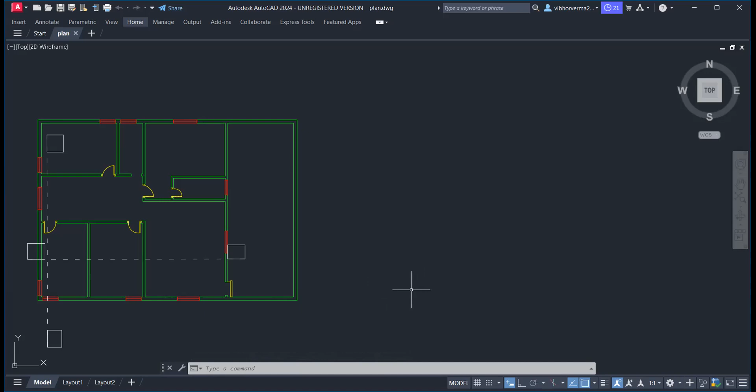Ritika, what about you?

Ritika? Ritika, Purval, what is the update from your end about the assignments?

Okay, you contact me personally, Ritika. Fine.

So now, today we are going to start the electrical and plumbing layout here.

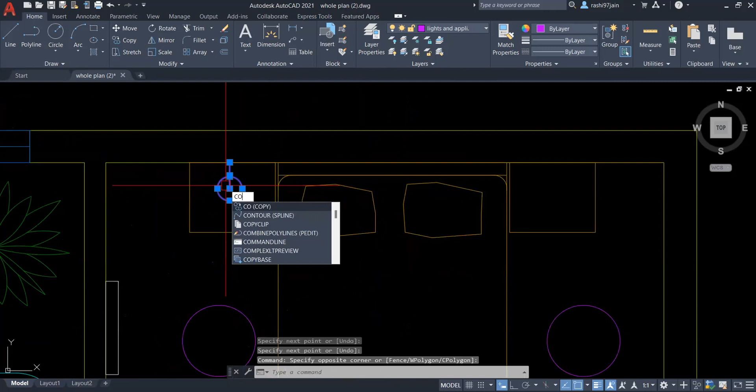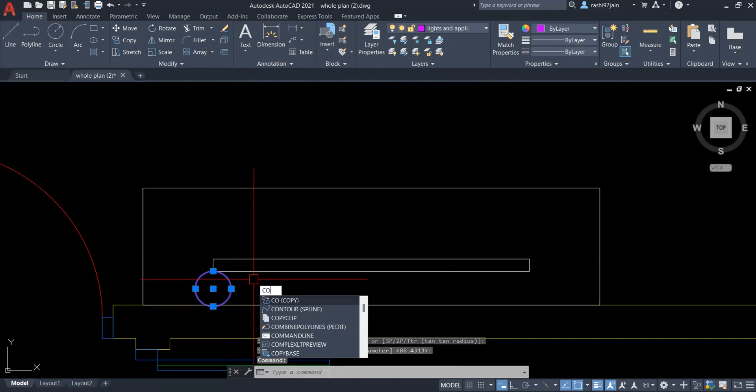Done. Then here you have the TV unit. Suppose for the TV unit, we are providing 4 drop lights, spotlights.

See guys, it depends on which space you are designing. You can't give as much light in a bedroom as you would in a living room, right? This much light is more than enough.

Okay, but no need to worry about it guys, we are not going to place circles. We have proper symbols, I'll teach you that part. But first understand the concept, then I'll show you symbols etc. Now position of the light is done - this much light is more than enough in bedroom.

Then I want to place connections, but till where will you show the connections? You need some limit, some boundary, right? So that limit, that boundary means switchboards here - you have to place the switchboards.

Now simply Shruti, you can place the rectangle, nothing else.

How to show the lights inside the floor? We call it uplighters. Same thing, you can show here only. You have symbols for that, I'll tell you.

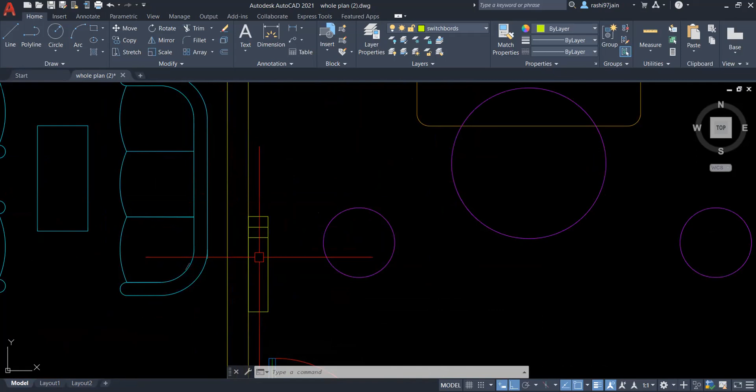Now 2 switches for 4 lights - you can't show a 4-light connection on a single switch, okay? If you need to turn it on, all four lights turn on; if off, all four turn off, right? Don't do this. Remember, 2 lights' connection on one switch and 2 lights' connection on another switch, okay?

Then one switch for a ceiling fan. Then again 2 switches for 2 plugs here.

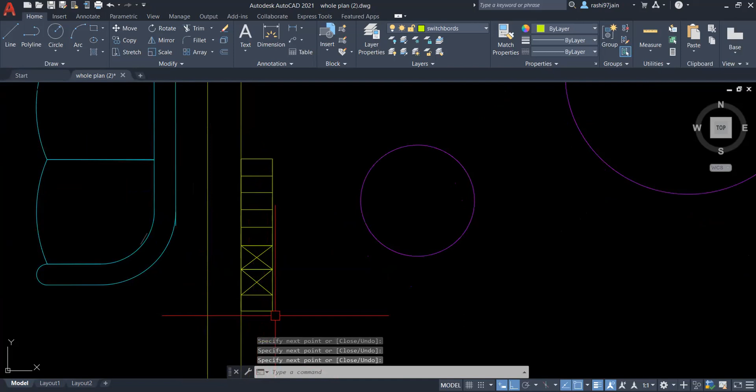Enough. Now here you have this TV unit, so for the TV unit also you need to place the switchboard - TV plugs etc. all need to be shown, right? So same.

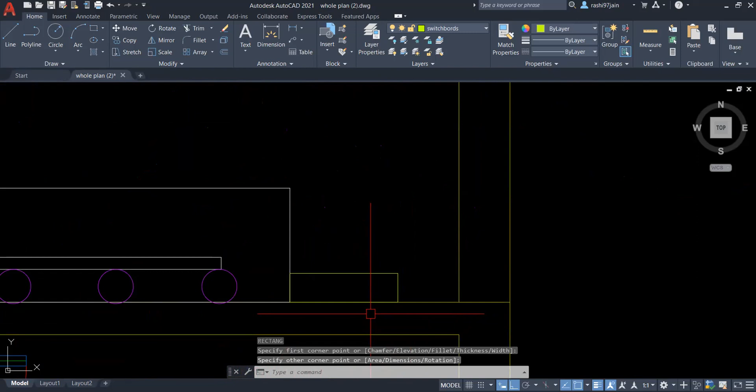2 lights and 2 switches for 2 plugs. Minimum 2 plugs are needed, no? One goes to the TV and second for your set-top box or home theater or whatever it is. Minimum 2 plugs are needed. Done.

And then last, guys, nowadays everyone wants a charging plug near the bed, right? So what you have to do - simply show 2 small switchboards near the bed.

One switch for this light and one switch for one plug here. Done. I will copy the same thing for the other end here.

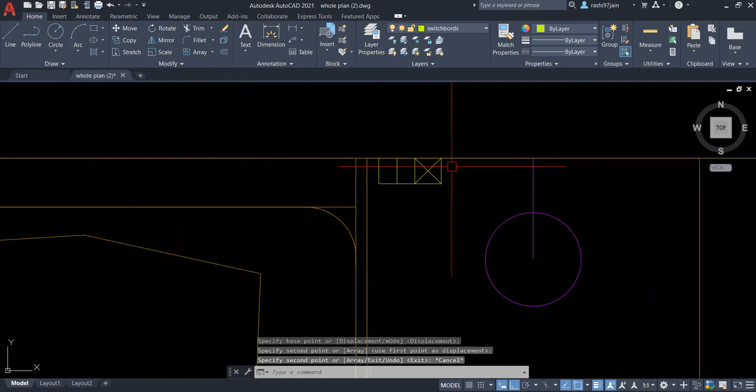Okay. Now, again, this much is more than enough. Switchboards, it's more than enough.

And then at last, you have to show the connections. Remember one thing, see your charging cable, your phone charger, your laptop charger, or any wire, any cable, it won't be straight, right? It will be little curvy, wavy type.

So you can't use a straight line to show the connections. That's why you have to use a spline here. Simply give SPL enter. Make sure your ortho is off, and then using spline, show the connections here.

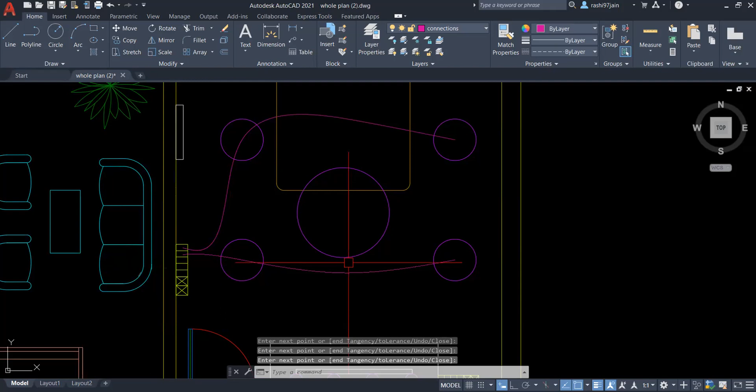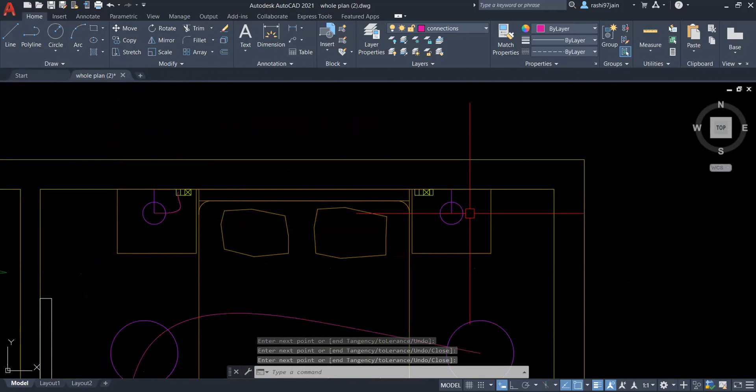Two lights' connection on one switch, 2 lights' connection on another switch, and a ceiling fan, right? Then, see, one light's connection, and again another light's connection, and at last these 4 connections.

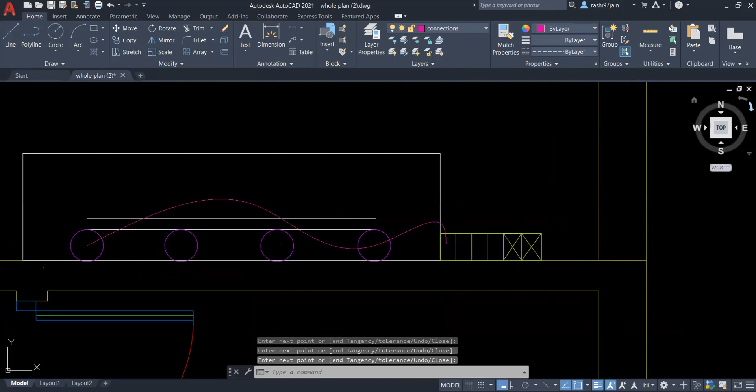See, 2 lights' connection on one switch, 2 lights' connection on another switch. Rest, the plugs and switches you have. See, it's done. First, position of the lights. Second, connections. And third, switchboard, right? But you can't present this drawing to your client.

It'll look like a child made the drawing, right? So remember, you have to use proper symbols there. Okay.

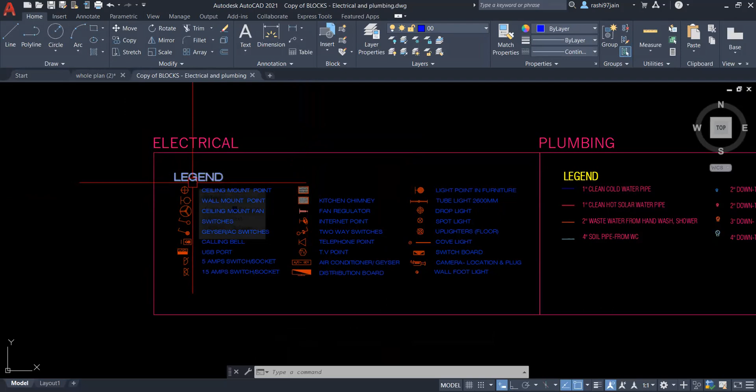This electrical and plumbing block file is uploaded in your Google Drive. You can download it later. First, see this now. So here you have electrical legends. Legend means symbols. These are the standard symbols.

If you want to show ceiling light, use this symbol. If you want to show ceiling fan, use this symbol. If you want to show a drop light or spotlight, use this. Now give Control C to copy, Control V to paste.

Done. Now guys, remember, whenever you are placing the blocks, yesterday also I told you, never ever place the blocks directly in the drawing. What you have to do? First, explode these blocks.

First, explode these blocks, place it in your layer. Whichever layer you are working in, you first place it, then explode it. It's difficult otherwise, that's why first explode it, and then basically you can place it.

See the difference? Ceiling lights in. Then ceiling fan is there. Once you are done, no need of this circle, you can delete. Then the same, the spotlight, drop light.

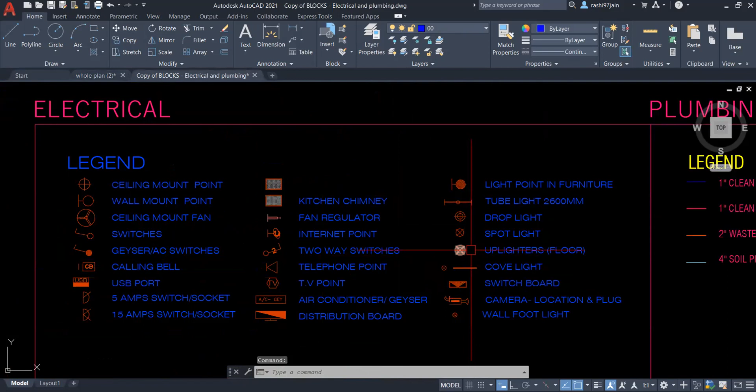Right, see now? Proper symbol, position of the light is done. So whichever lights you are using, floor lights meaning uplighters used on the floor, same way you can show this on the floor. For cove light you can use this thickness and you can draw. Done.

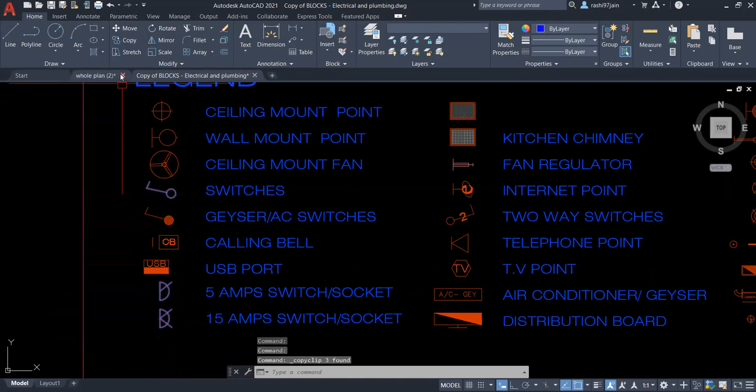Then second will come the switchboard. See here you have 5 amps, 15 amps, meaning 2 pin, 3 pin socket. Take this, and the switches' symbol is this. Same, Control C to copy, Control V to paste it.

Again the same thing. First, explode it, place it in your layer, and then wherever you want, you can basically place it. See, 1, 2, 3, 4, 5. Once your placement is done, you can delete those squares, rectangles, it's not needed.

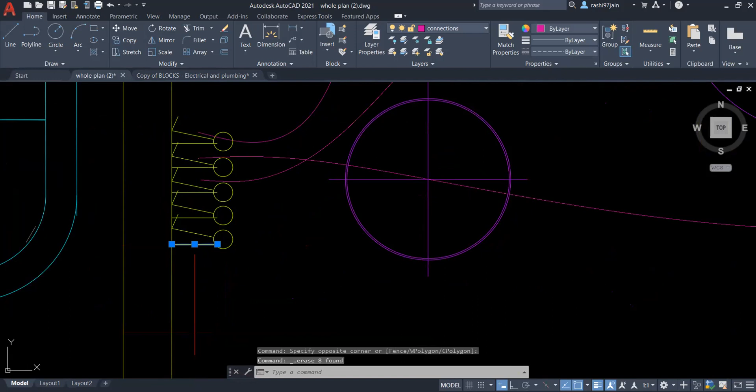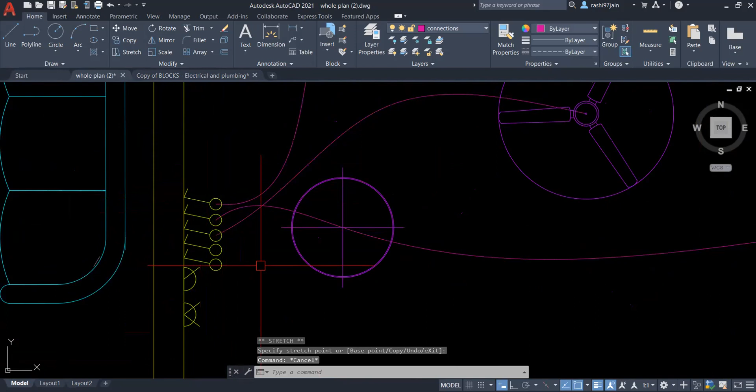And the plugs also you can show here, right? Now these connections, place it in the center here. You see? It's done. Meaning when you'll click, you'll understand that okay, from this switch this will turn on like this.

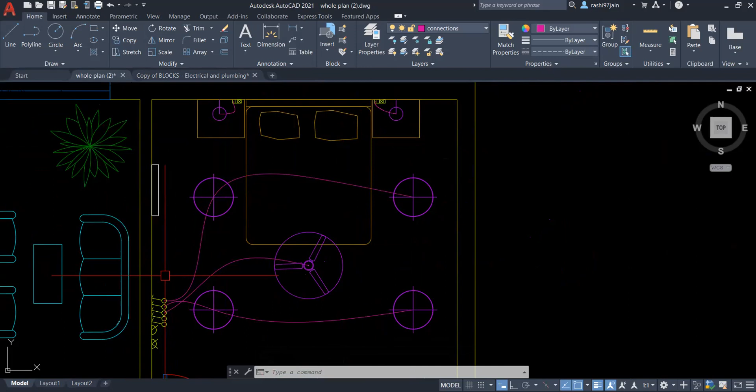But suppose someone is lying on the bed who wants to go till here to turn on and turn off the fan. No one wants to do this, no? That's why what you can do, you can provide a two-way switch, you call it a double switch. Meaning the same object you can operate from two switches. See? From here also, from here also. You know, right?

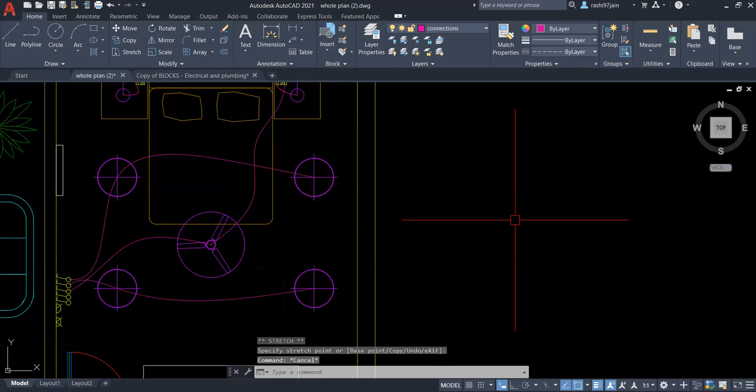Now for switchboards, symbols were used, okay, done. For lights and appliances you are using symbols. But what about connections? So remember, for connections you have to use spline only, no doubt.

But you can't show the splines, the connections, in a continuous line type, never. Remember what you have to do. Show these connections in a dash dash line type. Yesterday also I told you that in AutoCAD if any part is hidden and you need to show it that way, then you have to use dash dash line type there.

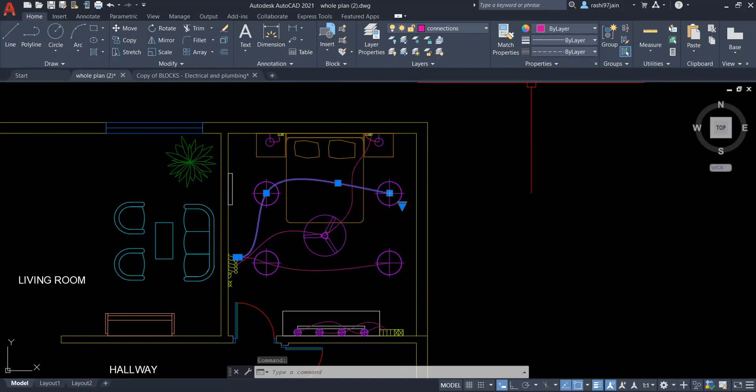Okay. Because if you are sitting, if you're looking at the ceiling, you won't be able to see connections, cables, right? It will be hidden definitely. So what you have to do, only change the line type here. It should be dash dash line type. I've already changed it. If it is not visible, then go to properties and change the line type scale here. It doesn't matter how much you are increasing or decreasing. It should be visible only. That's it.

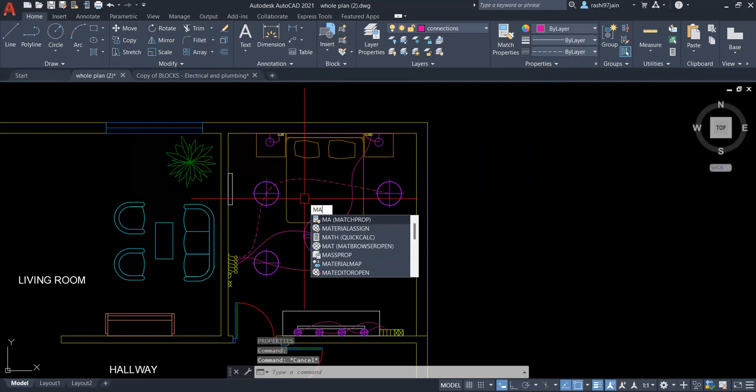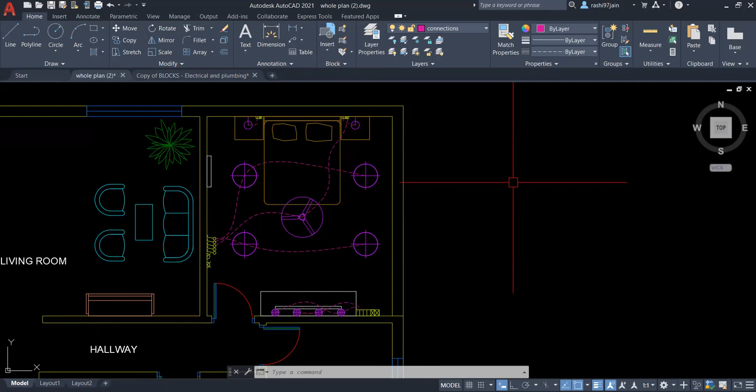Everywhere connections, we match this. Okay, and see now it's done. So this is the final drawing. This is the final output. The position of the lights and appliances, switchboards, and connections. This is for the bedroom only. Same way you can create for the entire plan.

But at last, don't forget to provide the legends here. Legends means these symbols only. Same, you can copy paste whatever you need from here. This symbol shows this thing. That symbol shows that. Like this. So is it clear, guys, how to create the electrical layout here? You understood?

Fine. So do one thing. For the plan you guys are working on, try to create the electrical layout for the living room. Only for the living room. I'll give you some time, I'll wait. If you want, use symbols, or else for now practicing with circles is also fine. Practice the electrical layout first and let me know. Then we'll proceed with plumbing layout. Try it out.

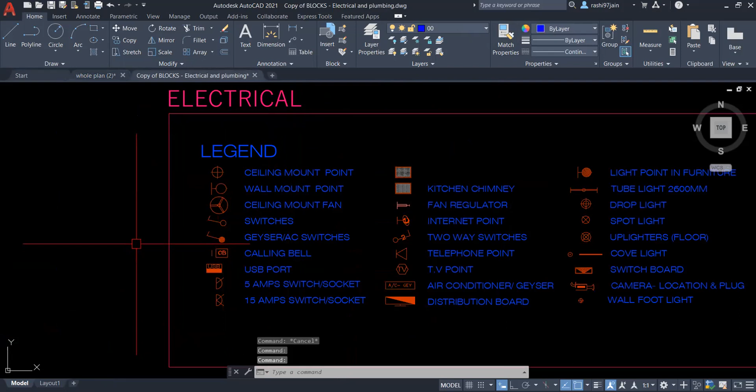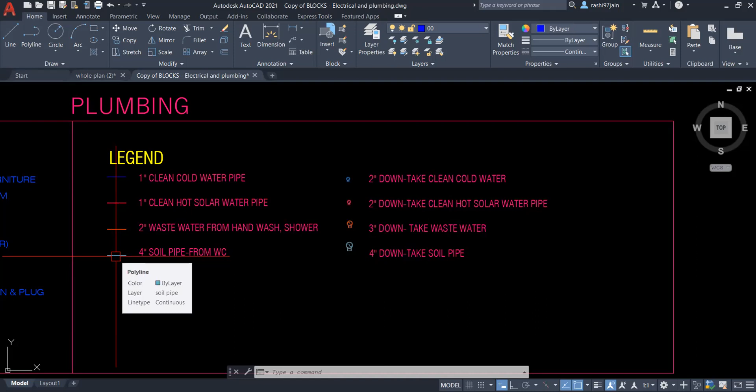Okay. Now see, after this, we'll proceed with the plumbing layout. Now, what is meant by plumbing? So guys, plumbing is basically nothing but the pipelines, the connections you have to show. Here you'll find 4 lines. Blue for clean cold water, red for hot water, orange for wastewater, and blue for soil pipe. Cold water, hot water, wastewater you know already, right? Soil pipe is for collecting whatever solid waste is coming through your WC.

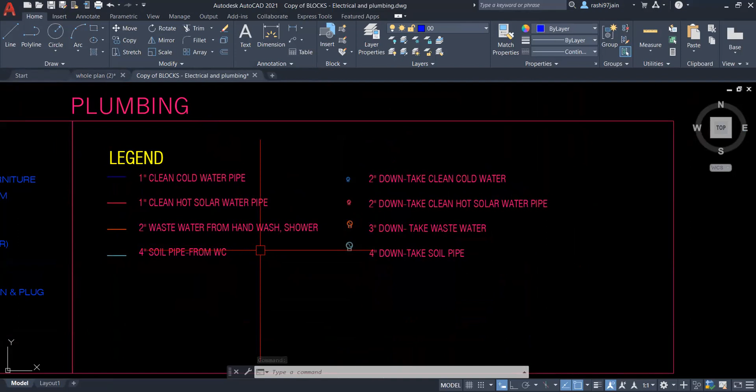Now, remember, the pipelines you can show using this straight line here. The spline, the curved line, is for the electrical layer. The straight lines are for the plumbing, for the pipeline. But till where do you show the pipelines? You need a limit, a boundary, right? That boundary means the main pipes here.

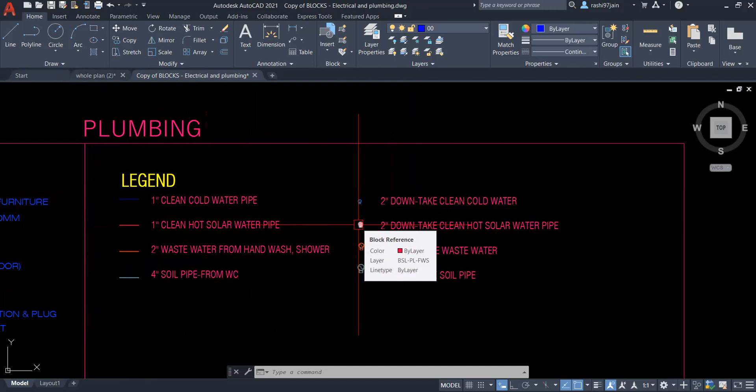Now, it's not that you have to use the same colors we are showing. If you want, you can change the colors also. But remember, you need to use the same color code for the main pipe also. See, blue for clean cold water. Same here, blue for the main pipe. Red for hot water. Here also red for the hot water. Same. I copy paste the main pipes here.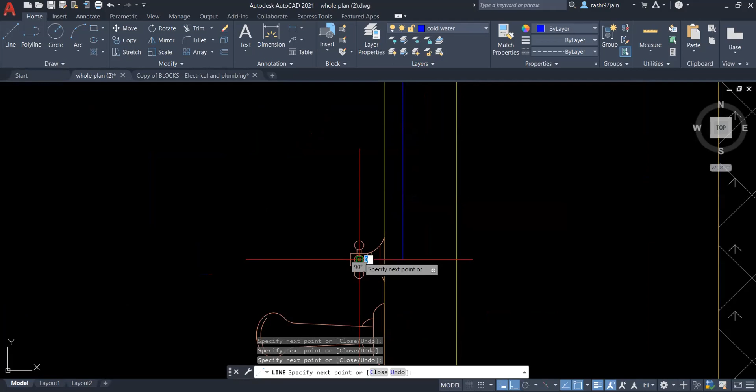Now, one by one, we'll show the connections. So I'll take clean cold water first, using the line tool. Show the clean cold water here in the WC, then in the wash basin, then in the wet area, for the fixtures. Till where? Till the main pipe here.

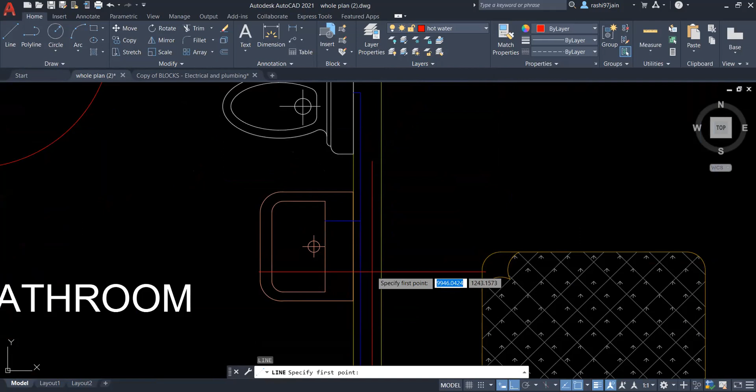Again, I'll take hot water. Hot water pipe is not needed in the WC, right? So, hot water pipe connection in the wash basin. Nowadays clients want a hot water pipe in the wash basin also, so you have to provide that. Then again for the fixtures, till the main pipe here. Done.

Then I select wastewater to show the wastewater pipe. The wastewater will go from your wash basin.

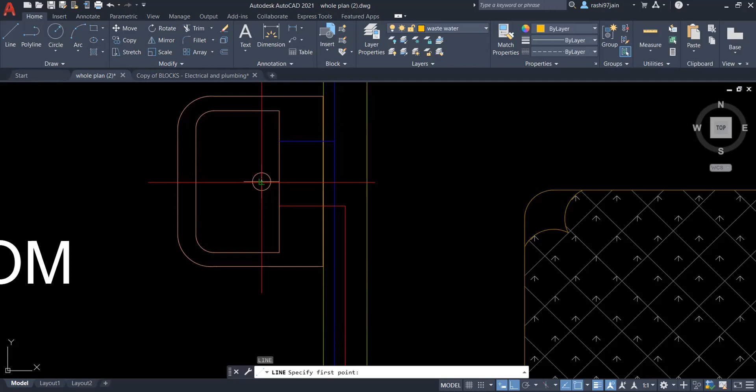And then at last, select soil pipe. As I told you, soil pipe is nothing but whatever solid waste is coming through the WC. Okay, straight to the soil pipe here. Then the main pipe. No need to break this pipe anywhere.

That's it. Now I know you guys are thinking, ma'am, so many connections and pipelines go through the wall. No. Practically it goes through the floor. Okay. The plumbing pipelines go through the floor. But for the presentation purpose, you need to show this through the wall only. Okay. Only 4 pipelines are there.

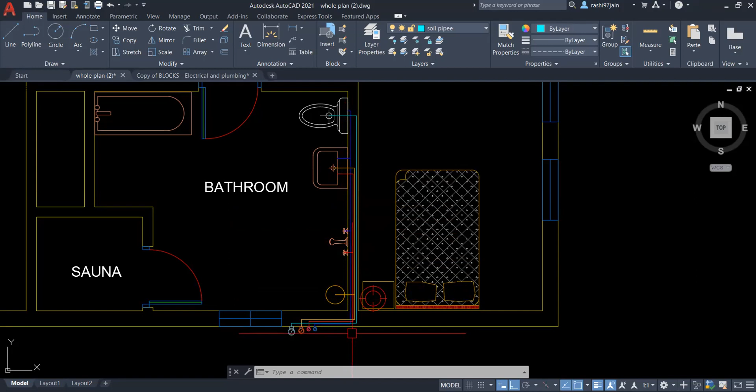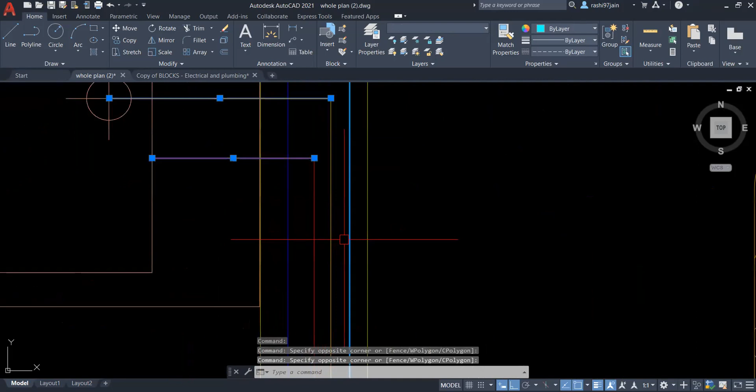Place it. But once you are done, select, and you have to change the line weight here. Okay. You have to change the line weight here. So select the lines. Then from here, change the line weight and change the transparency also by 40%. You can change the transparency here and see, it's done. Okay.

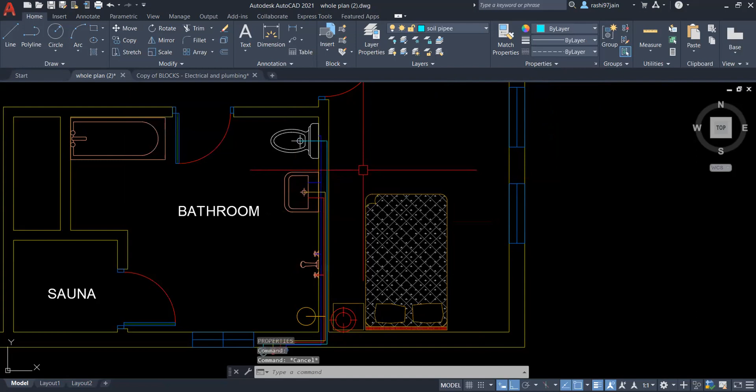Once you are done with this, again, don't forget to place the legends here saying that okay, this color shows this and that color shows that. Okay. So is it clear? You understood how to create the plumbing layout? Fine. So try out the plumbing layout for the kitchen area of your plan, and let me know once you are done.

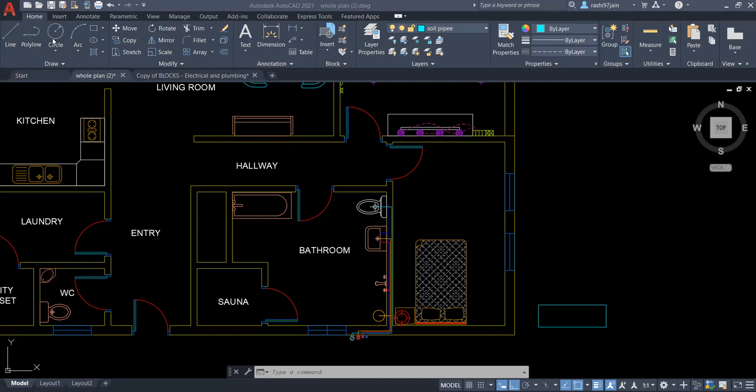Okay, guys. So what is the update? Is it done? Electrical and plumbing both. Fine. So see, I'll give you one assignment here. What you have to do, create the electrical layout for the entire plan. Okay. For whichever plan you guys are working on, create the electrical layout for the entire plan and then create the plumbing layout

for that same plan. Remember one thing, you cannot create electrical and plumbing layout in the same drawing. Okay. Make a copy of that plan. So in one copy, you can create the electrical layout, and in another copy, you can create the plumbing layout. Okay. As you know, today is the 9th class. Tomorrow will be the last class, which is your 10th class.

Okay. So now I'll assume you guys are ready with your plan, elevations, sections, and, if you do the assignment, electrical and plumbing layout by tomorrow. So from my end, whatever I promised, I taught you each and everything. Rest, how you can implement this whole project in template, layout, page setup, how you can scale the layouts and all small things, we'll cover in tomorrow's class, and we'll get the final output, final print.